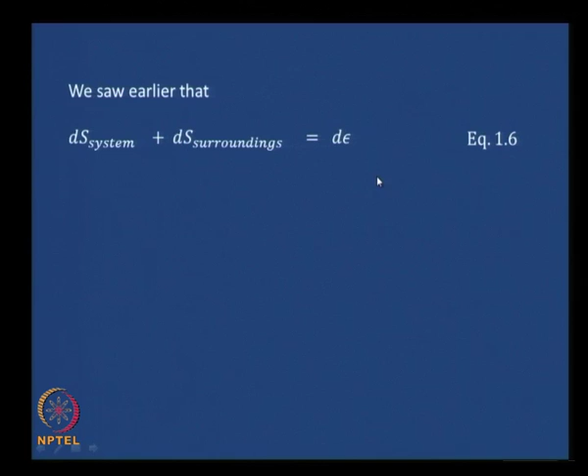Now let us consider these surroundings as a heat sink, as it is called, at a constant temperature T0. This heat sink is a very useful concept. It actually refers to bodies whose temperatures do not change despite interactions with the systems they are in contact with. For example, there are many things that can be considered as sinks or approximated as sinks. We can consider the Earth's atmosphere as a sink. It remains at a constant temperature for a certain period of time, or the Earth's surface could also be considered a suitable sink, especially for biological systems of relevance.

Let me also state this - it may not be completely clear right now, but it will become clear maybe after the 5th module or so. The heat sink is also supposed to be in a condition of internal equilibrium with no irreversible changes occurring inside it. This needs to be stated as one of the conditions of the heat sink. Let me state it again and leave it at that, and let us wait till the 5th chapter to make better sense of it. The heat sink is supposed to be at a condition of internal equilibrium with no irreversible changes occurring inside it.

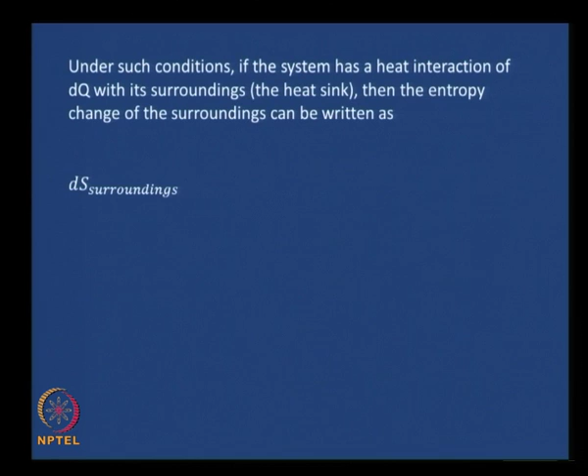Under such conditions, if the system has a heat interaction of dq, a differential q, with its surroundings, which is the heat sink in this case, the entropy change of the surroundings can be written as - remember the second law we looked at earlier - ds of the surroundings is nothing but minus dq by T0, minus because of the convention, the direction with which this negative is associated. Remember, we are writing this for the surroundings. So minus dq by T0. Let us call this equation 252.

Since we have already identified ds surroundings as minus dq by T0, we will drop the subscripts now just for convenience, and ds will as usual correspond to the system. ds system plus ds surroundings, which has been replaced by minus dq by T0, is the same as d epsilon. ds minus dq by T0 equals d epsilon. Let us call this equation 253.

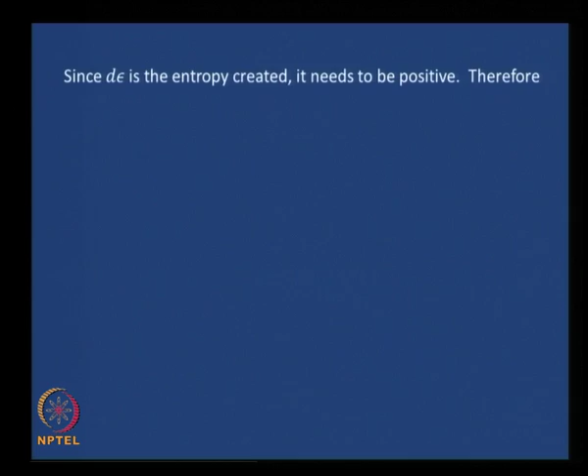Remember, d epsilon is the entropy that is created, and according to the second law, expanding universe and so on, it definitely needs to be positive. Therefore, dq by T0 needs to be either less than or equal to ds. This directly follows from this equation - we are comparing this and this. This needs to be less than or equal to ds for this to be positive. We will call this equation 254.

These are all very generic, coming right from the second law, and this equals ds for a reversible process undergone by the system, and is less than ds for an irreversible process.

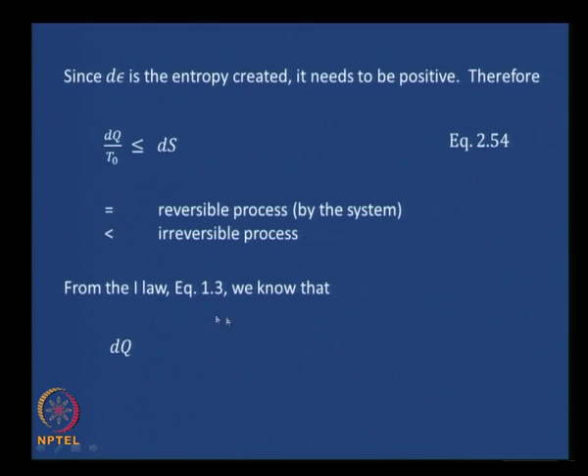Now, let us look at the first law, some very basics again. Equation 1.3, we know that dq, this is for a closed system, dq equals du plus dw. If we substitute the first law of thermodynamics into equation 253, ds plus minus of dq by T naught equals d epsilon, we are going to substitute for dq, and we will get ds equals dq being replaced by du plus dw, all divided by T naught, plus d epsilon. We have transposed the equation, therefore the negative sign goes away there.

Or if we multiply throughout by T naught and then transpose the equation, we will get T naught ds equals du plus dw plus T naught d epsilon, and then grouping the terms appropriately we can write dw equals T naught ds minus du minus T naught d epsilon. We will call this equation 255.

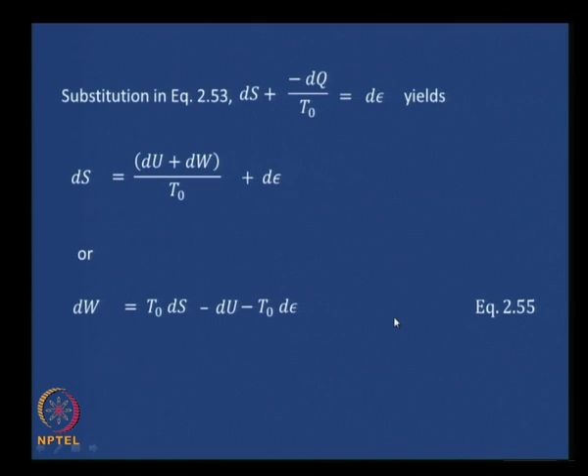Note that d epsilon is positive, and T naught, the temperature, needs to be positive in Kelvin. Therefore the product of those two terms, T naught d epsilon, is positive, and thus dw needs to be less than T naught ds. This needs to be positive, and dw needs to be less than or equal to T naught ds minus du. Du we do not really know what is happening there. We will call that equation 256.

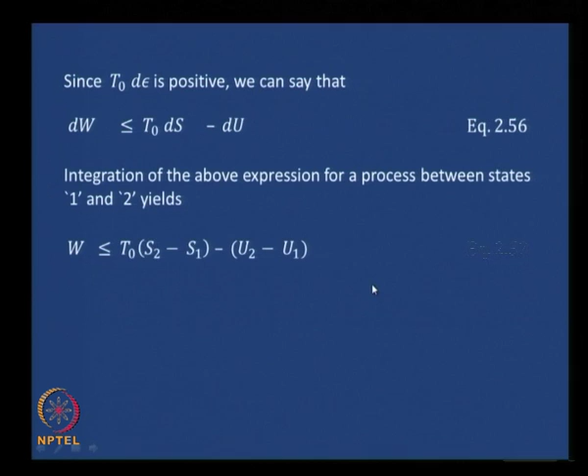Now if we integrate this expression between the states 1 and 2, it is a straightforward integration. Integral dw is w, and this inequality remains less than or equal to T naught ds integrated between 1 and 2, giving S2 minus S1, minus du integrated between 1 and 2, giving u2 minus u1. We will call that equation 257.

Note this equation: this is some quantity and this is some quantity. Since w is less than or equal to the right hand side, the maximum work possible is when w equals the right hand side. Therefore the maximum work possible, which occurs under reversible conditions, indicated by w max, can be written as T naught times S2 minus S1, minus u2 minus u1.

Therefore we have a measure of the maximum work available from a process in terms of the state variables of the system. T naught is the temperature of the surroundings, while S2, S1, U2, U1 all correspond to the state variables of the system. Let us call that equation 258.

We started out by saying this, so let me re-emphasize it. The maximum work can be used to arrive at limiting conditions, for example the maximum possible work for a closed system, which can in turn be used for quick estimates, to evaluate claims on design, as well as to begin the design itself.

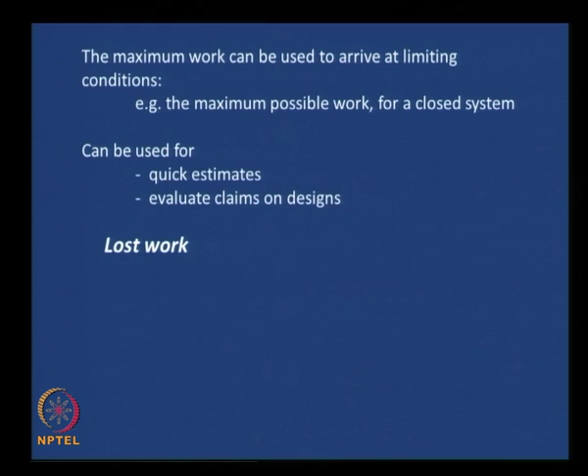The lost work, as we said, is the difference between the maximum work and the actual work, that is the ideal or reversible work minus the actual work. The reversible work we have as T naught ds minus du, from earlier. The actual work happens to be T naught ds minus du minus T naught d epsilon. Therefore these two terms cancel, and we have an expression for the lost work as T naught d epsilon.

After integration, we get work lost equals T naught times epsilon, in terms of the sink or surroundings temperature, assumed constant, times the entropy that is created. We will call this equation 259.

At this juncture, we have looked at many different things so far in this module, and therefore it will be good to review whatever we have seen so far, especially in thermodynamics. There are lots of relationships and lots of seeming confusion, but actually there isn't much. If you look at it another time, things would be a lot clearer. We will do that before we get on to open systems. So let us start a review before we go on to open systems.

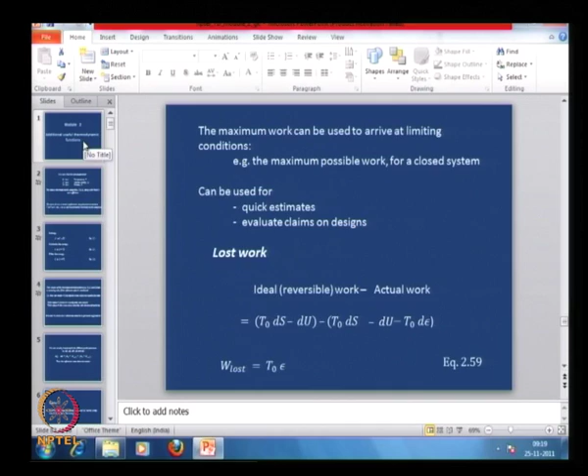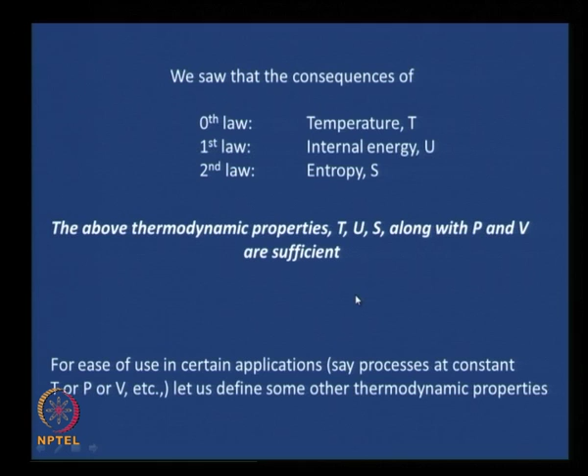We began this module looking at additional useful thermodynamic functions. We said that internal energy U and entropy S, along with P, V, T, are typically good enough thermodynamic functions, but in certain cases we said certain other functions would turn out to be more useful, and we went ahead and defined them.

The first one was enthalpy, defined as internal energy plus the product of P and V. The next was the Helmholtz free energy, which we will use to a certain extent in this course, but in general it is useful. Helmholtz free energy, indicated as A, is the difference between internal energy and the product of temperature and entropy. And Gibbs free energy, G, is the difference between enthalpy and the product of temperature and entropy.

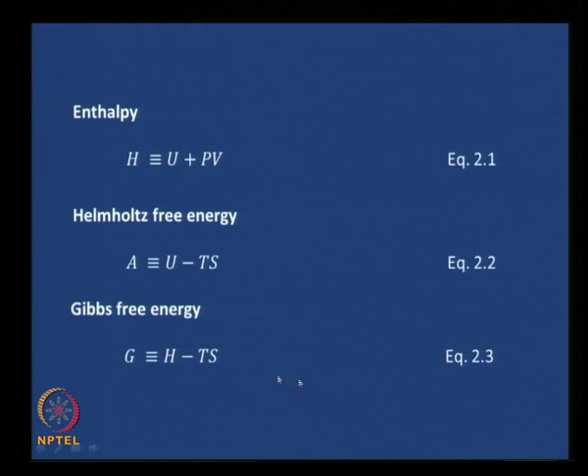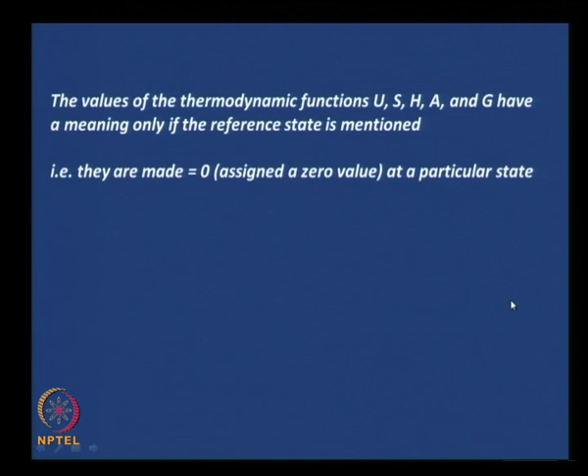These were the three additional functions we defined. We then said that any thermodynamic function needs to be given a reference state. The value of the thermodynamic function, whether U, S, H, A, G or others, makes sense only with a reference state being mentioned. At the reference state we assign a value of 0 to it, and we went through the exercise of thinking about where the temperature is actually assigned a 0 value.

If you think about it, it's an assignment of a 0 value at a certain condition where there is no movement of molecules and so on, and we also looked at where the 0 value of pressure is assigned, where we said it is equal to 0 when there are no particles, with complete absence of particles. And the nice thing about thermodynamic manipulations is that one can fix one's own reference state for a particular application, but only at a certain reference state, with the value being 0.

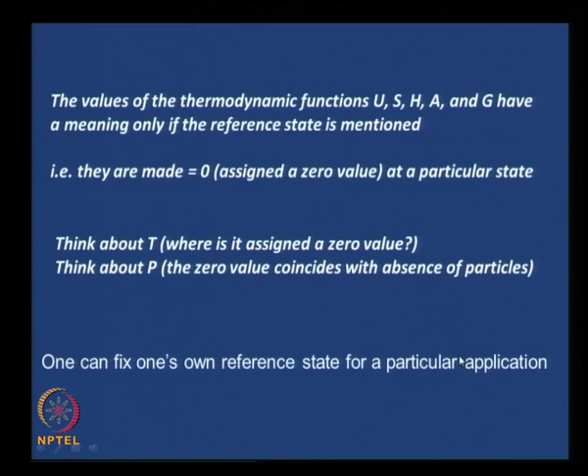Only if that is done will any of the thermodynamic functions make sense. And then we said that reference state does not really matter. We demonstrated that by considering the difference in, say, U, for a particular process. We said that if U2 is some value, then U2 minus U reference is the value that makes sense at state 2, and U1 minus U reference is the value that makes sense at state 1. Taking the difference, (U2 minus U reference) minus (U1 minus U reference), the reference terms cancel out, leading to U2 minus U1. Therefore, whatever is chosen as a reference state does not really matter, because we take differences all the time.

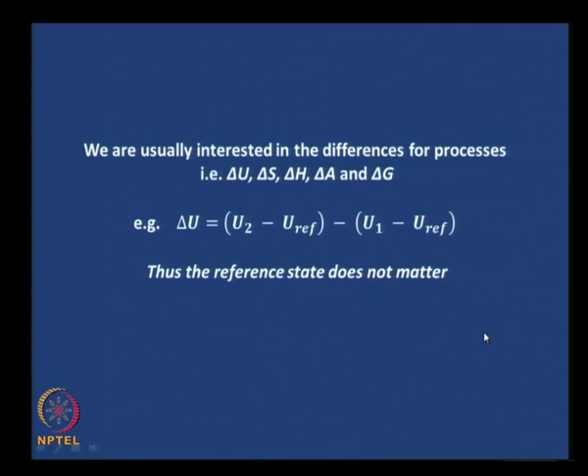And then we went and did some exercises, and we also said that H, A and G were defined for 1 mole, and if there are n moles of a pure substance, then we can either call that as NH, the value of enthalpy as NH, which will be defined as NU plus P times NV.

P is an intensive variable, it does not depend on the number of moles that are available, but we said that a better terminology would be to consider a superscript T for total values when there is more than one mole present. Therefore, Ht equals Ut plus P Vt, At equals Ut minus T St, these are all definitions, and Gibbs free energy total, Gt, was equal to Ht minus T St.

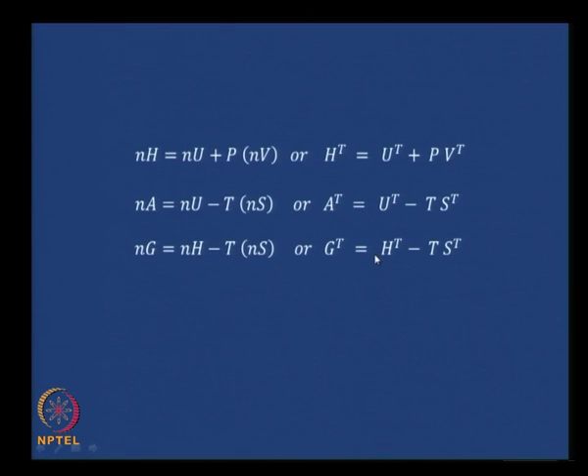And then we went on to consider 1 mole of a pure substance, and we also said at this point that whatever we are going to develop in this module, unless otherwise stated, will be for a closed system, okay. And that is where we have stopped right now.

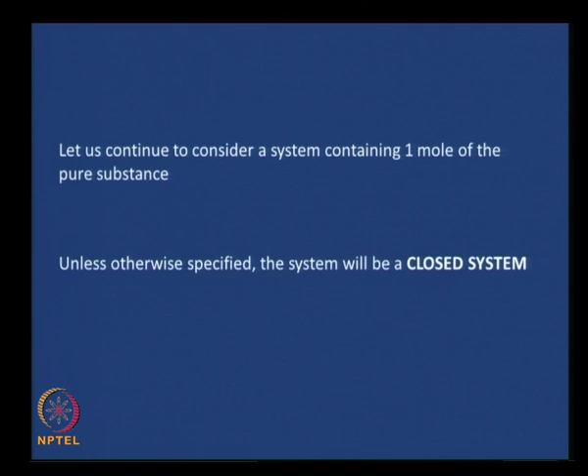We have developed all the necessary fundamentals for a closed system, and therefore, before we went on to open systems, we thought we could do a review. We started by considering a single component system which exists in a single phase.

As we all know, the phases that are being considered in this course are only 3: either a gas, or a liquid, or a solid. Gas is also called vapor.

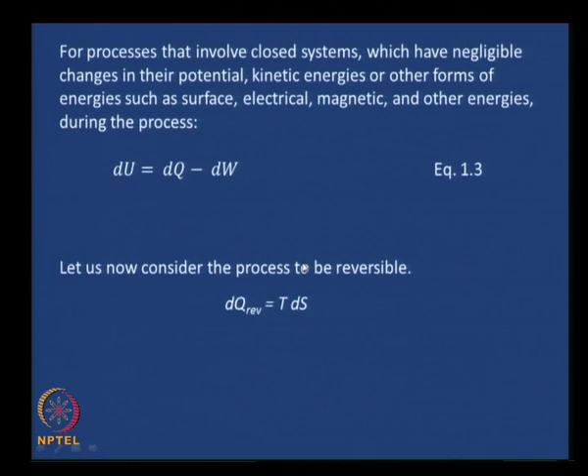And we said that for processes that involve closed systems which have negligible changes in their potential, kinetic, or other forms of energies such as surface energy, electrical energy, magnetic energy, we could write dU equals dQ minus dW, this is the first law. And if we consider the process to be reversible, we could write the second law as dQ reversible equals TdS.

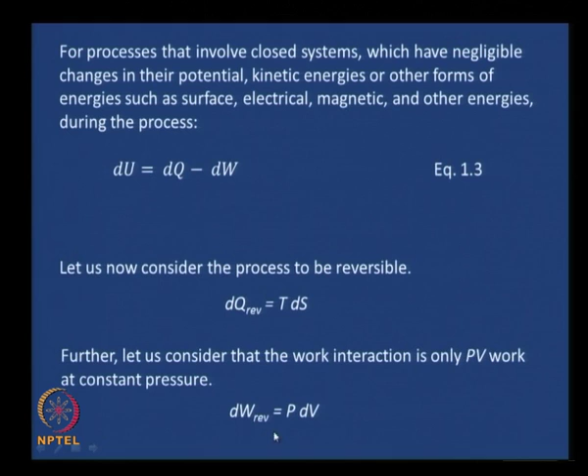And if PV work is the only work interaction that is considered at constant pressure, then dW reversible was P dV. Under such conditions, we could modify the first law as dU equals dQ reversible minus dW reversible, and therefore, we could write dU equals TdS minus P dV. You could recall that this became one of the most basic equations for a closed system.

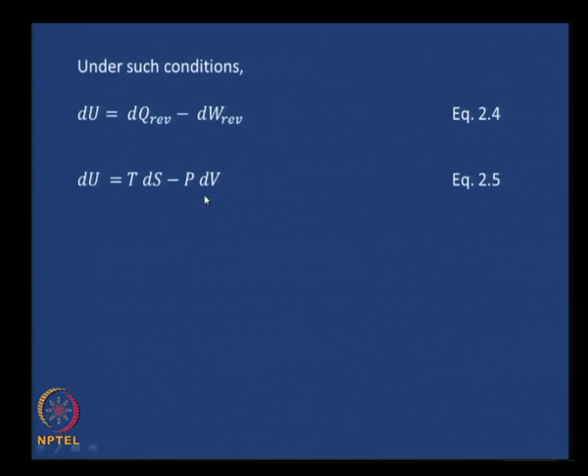And we also said that although we considered various things to arrive at this particular point, that is dU equals TdS minus P dV, since this equation contains only state variables which depend only on the state of the system and not on the path taken to reach, say, state 2 from state 1, this is valid for anything as long as it is that of a closed system.

And to understand that a little better, the equation as a whole is applicable for anything. Nevertheless, the interpretation of the individual terms is applicable only for that particular path. For example, in this case, TdS represents heat interaction only for a reversible process, and P dV represents work interaction only for a reversible process. That does not change.

Nevertheless, the difference between the two, which is dU, is applicable in general, whether the path is reversible, irreversible, whether it has kinks in between it or a smooth path, nothing of that sort matters.

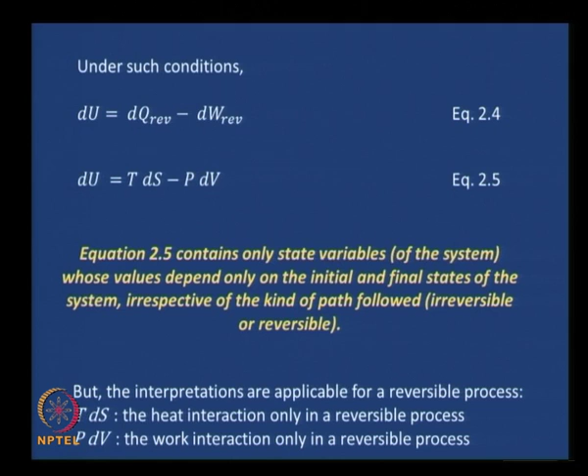And to understand that a little better, because this was one of the central concepts that we were going to use repeatedly later, we sought to understand that better by considering a mountainous region in which our interest was the difference between the heights between 2 points, let us say 1 and 2, or states, if you want to call it state 1 and state 2.

Our interest was h2 minus h1, the difference in heights. We said there could be different paths taken - you could take a nice road, a hilly road which is not well charted out, or take a helicopter and land here. Whatever path you take, the difference in heights between these two remains the same; it does not really depend on the path. That is the same thing that happens whenever we have the final equation in terms of state variables, irrespective of the path considered.

Also, we said that some paths could make it easier for us to compute the difference in thermodynamic functions between the two states. For example, along the nice road, an altimeter is available, so you could measure the heights at various points, and the difference between 2 and 1 would give you the delta h required. Therefore we choose an experimental path where the means of measuring the variable of interest is available, and once we bring it down to an equation consisting only of state variables, we can use that equation in general.

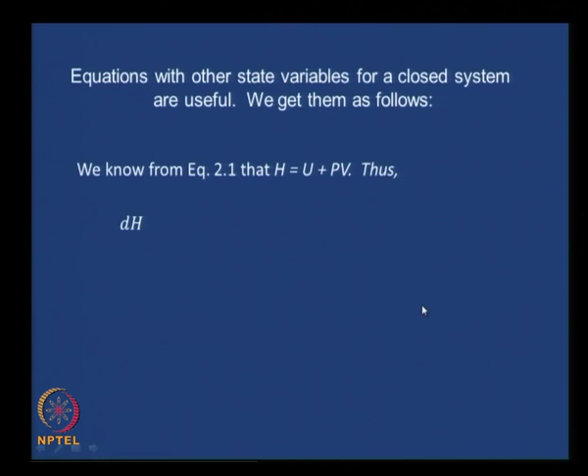We also said there could be other equations for a closed system which would come in useful, and we derived them. Let me not go through the derivation but tell you just the final expressions - you can go back to the slides and look at how we derived them. We said that dH equals TdS plus VdP.

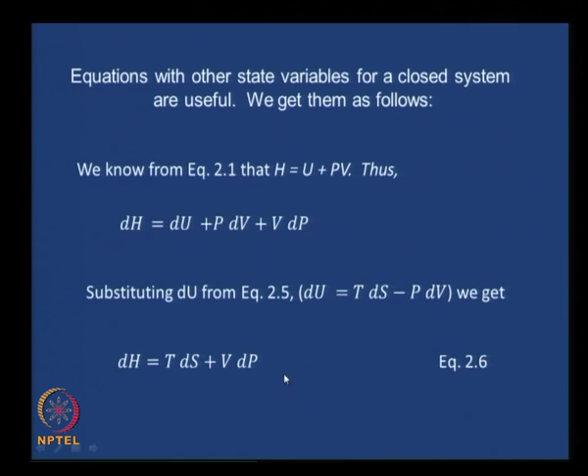dA was minus SdT minus PdV, and dG was minus SdT plus VdP. I think we also put it all together somewhere. Yes - dU equals TdS minus PdV, dH equals TdS plus VdP, dA equals minus SdT minus PdV, dG equals minus SdT plus VdP. These are nice equations to remember, 2.5 to 2.8, especially if you have closed book exams as typically happens in university exams. If not, you know how to derive them reasonably quickly, and you do not have to remember these.

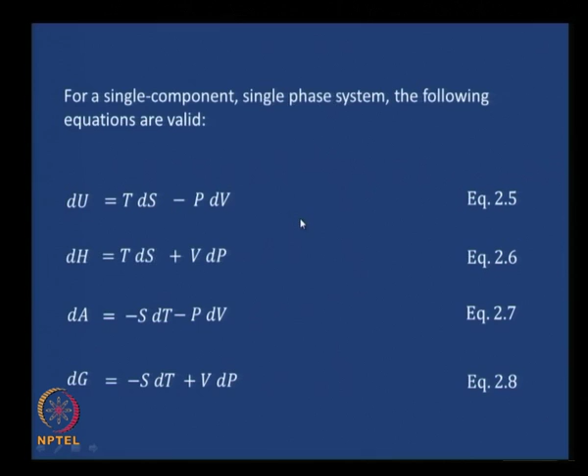We also said that if the number of moles is more than 1 - the earlier equations were all for 1 mole of a closed system, pure component - the same equations are valid. This is not very obvious, so you were asked to look at your reference book by Kenneth Denbigh, where the proof is given as to why the same forms are applicable even for total variables, the thermodynamic variables taken for systems with more than 1 mole of the pure substance.

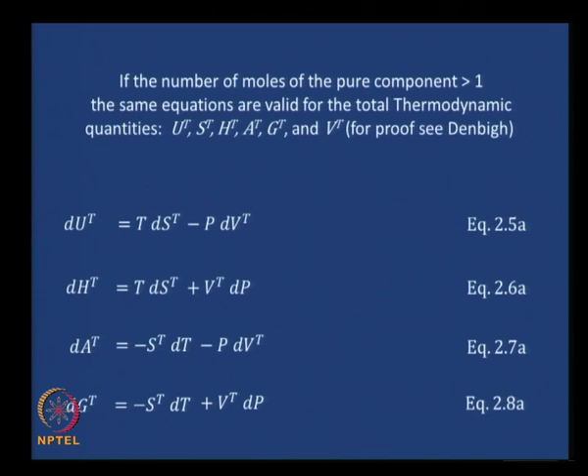Therefore dU total equals T dS total minus P dV total - since T is an intensive variable it does not need a superscript, similarly P is intensive. dH total equals T dS total plus V total dP, dA total equals minus S total dT minus P dV total, and dG total equals minus S total dT plus V total dP. So we looked at equations for a closed system of a single mole, and for a closed system of more than 1 mole but of only 1 pure substance.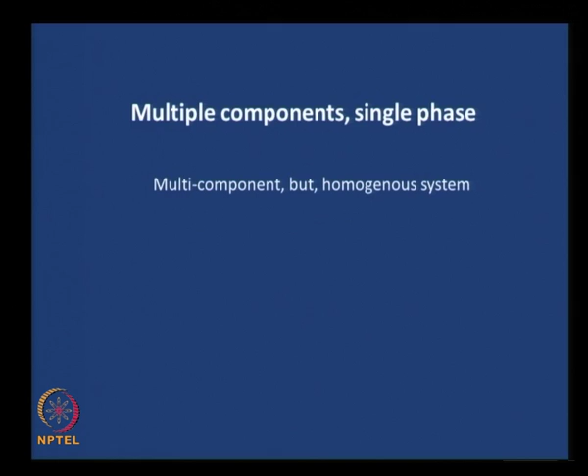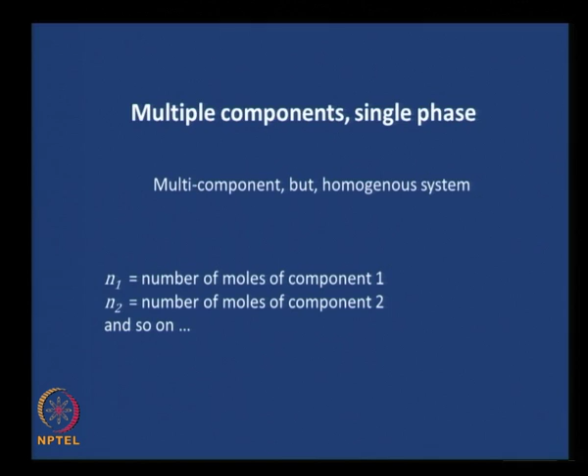Then we complicated it a little by considering a multi-component system, but retained the single phase nature of the substance. This was some terminology - N1 is the number of moles of component 1, N2 the number of moles of component 2, and so on. This could be a multi-component single phase system, for example air which contains water vapor. Air by itself has many different components in the gaseous phase such as oxygen, nitrogen, carbon dioxide, and if you add water vapor it also has H2O - that is a very good example of a multi-component system existing in a single phase.

For that we looked at what equations would be useful to use. To derive that, we started with the generic mathematical representation of a function of a variable in terms of its independent values. We took U total as a function of S total, V total and so on, and we wrote the total differential going by one of the theorems in calculus - total differential dU total equals partial of U total with respect to S total.

St is the first variable taken here, with all other variables remaining constant: Vt, n1, n2, n3, the constancy of which is represented as ni, gives dou Ut dou St dSt, plus the second variable dou Ut dou Vt with all other variables constant times dVt, and dou Ut dou n1 with all others constant times dn1, plus dou Ut dou n2 dn2 and so on. We combined all the n terms into a summation sign for compact notation as sum of dou Ut dou ni at constant Vt, St, nj, which represents the constancy of all n's except the one being differentiated, dni.

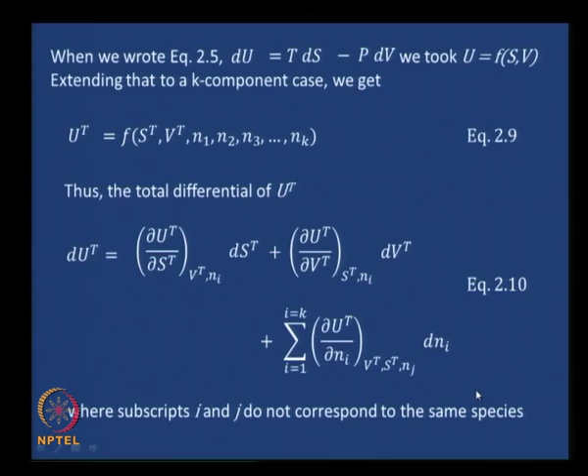And then we got down to dou Ut dou St at constant Vt, ni equals T, and dou Ut dou Vt at constant St, ni equals minus P.

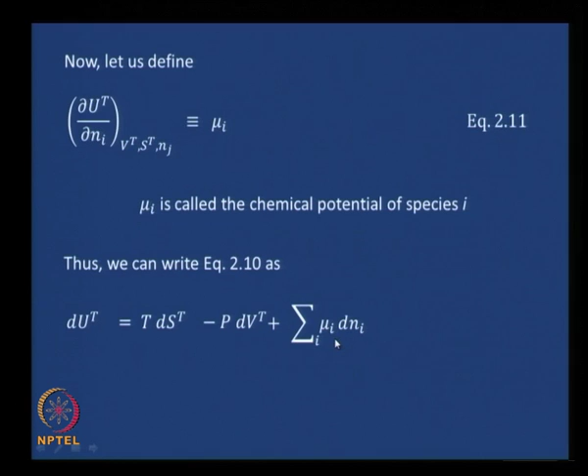And we said that we went ahead and defined one of the fundamental intrinsic properties which will pretty much form the backbone of this course, as you will find out in the later modules. We said that dou Ut dou ni at constant Vt, St and nj equals the chemical potential, and therefore you could write the equation as dUt equals T dSt minus P dVt plus sum over mu I dni's, and we could derive the other equations also.

dGt equals minus St dT plus Vt dP plus sum over all I mu I dni, and since we used the same term mu I whether we started from Gt or Ut, we had to prove that they were the same. Before that, one important point to note is that dou Gt dou ni at constant T, P, nj equals mu I. This definition is predominantly used because the terms held constant here, T, P, nj, are all easy to manipulate from an experimental point of view, and therefore this is pretty much the preferred definition of mu I, although you could define it by the other three means also.

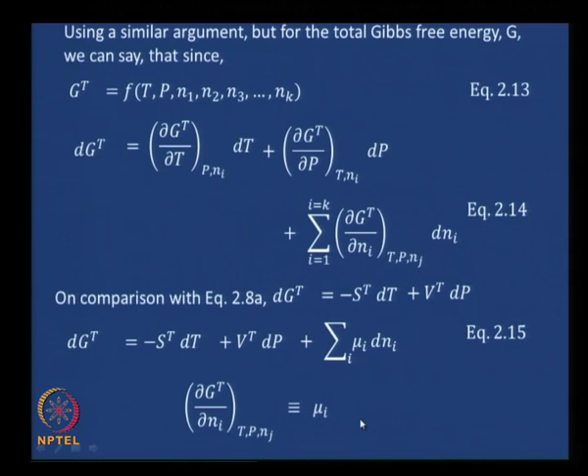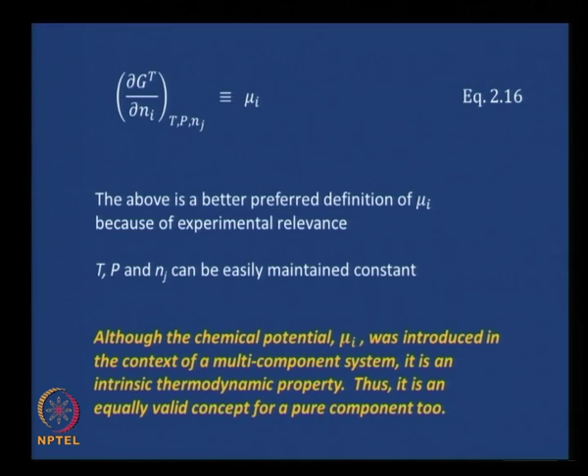This is how we went about proving that mu I is the same whether we started from Ut or from Gt. I will not go through the proof; you could go back to your notes and see how we proved it. This is important: although the chemical potential mu I was introduced in the context of a multi-component system, it is an intrinsic thermodynamic property, thus it is an equally valid concept for a pure component also.

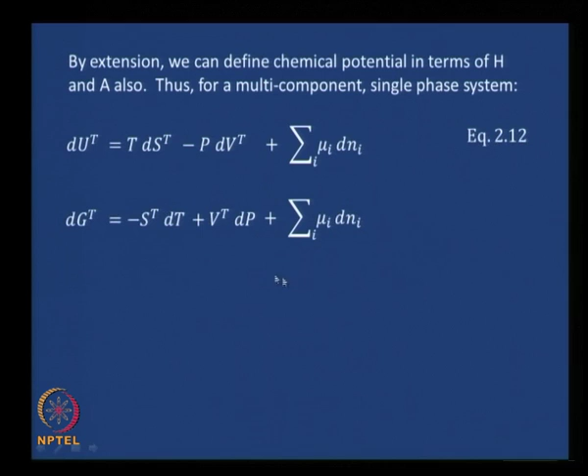We extended the derivation to other thermodynamic variables of interest such as At and Ht, you could do that, and we have a comprehensive set of equations valid for a closed system consisting of multiple components but in one phase: dUt equals T dSt minus P dVt plus summation of mu I dni, dGt equals minus St dT plus Vt dP plus summation of mu I dni, dHt equals T dSt plus Vt dP plus summation of mu I dni, dAt equals minus St dT minus P dVt plus sum of mu I dni. So irrespective of how mu I is defined, they are all the same.

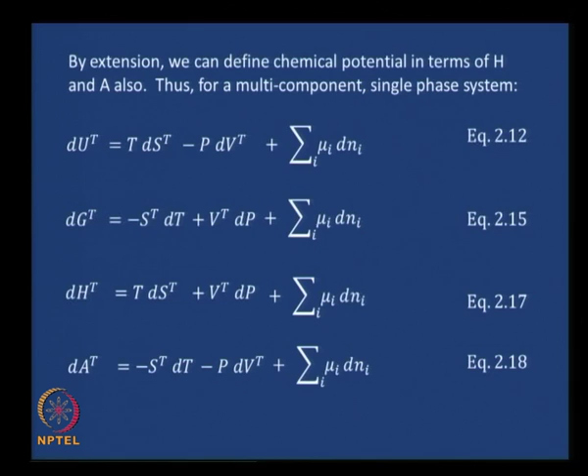Now we did a nice exercise by which we could compare the equations with the standard expansions written in terms of partial derivatives, and therefore we could assign partial derivatives to the thermodynamic functions. For example, we said dou Ut dou St at constant Vt, Ni, going by a standard expansion for the total differential, is nothing but T, and this T is also dou Ht dou St at constant P, Ni. Similarly, dou Ut dou Vt at constant St, Ni was minus P, and this minus P is dou At dou Vt at constant T, Ni. Minus St here, in terms of an expansion, is dou At dou T at constant Vt, Ni; here it is dou Gt dou T at constant P, Ni. Vt was dou Ht dou P at constant St, Ni, and Vt was also dou Gt dou P at constant T, Ni, and this is quite straightforward. We have already seen this.

Mu I here was dou Ut dou Ni at constant Vt, St, Nj; here it was dou Ht dou Ni at constant St, P, Nj; here it is dou At dou Ni at constant T, Vt, Nj, there is to be a superscript here; and here it was dou Gt dou Ni at constant T, P, and all other Nj's. So this is a nice relationship between thermodynamic properties and derivatives, which will turn out to be useful in many manipulations.

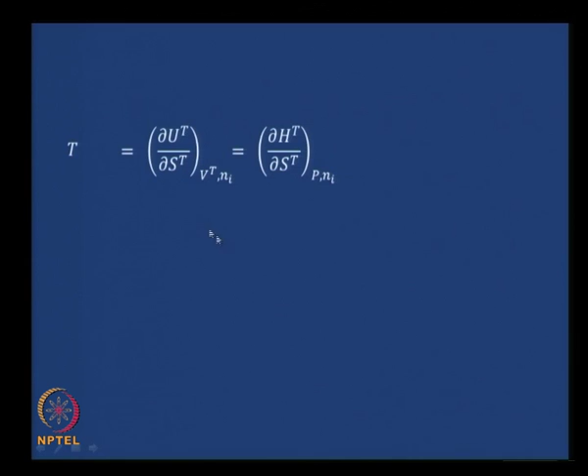This is just listing it out. I don't think I will go through it again, we have already seen it. Okay.

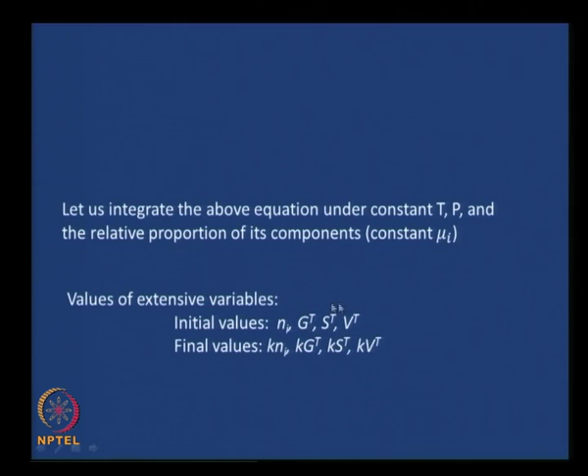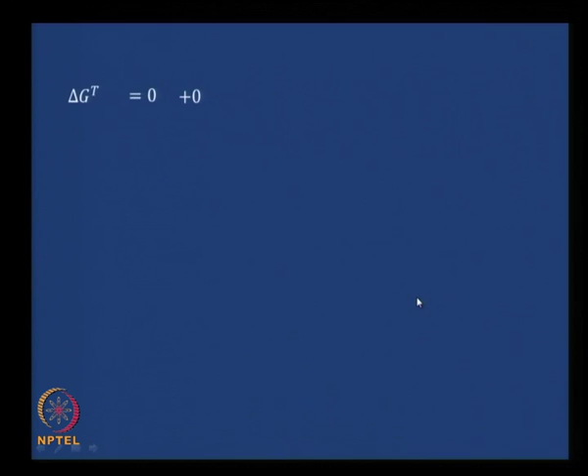Then we looked at one of the central equations in classical thermodynamics, called the Gibbs-Duhem equation. We went ahead and derived it by starting with the expression for dG and integrating it, considering a system being made larger and so on, and we arrived at this equation.

St dT minus Vt dP plus sum of Ni d mu I equals 0. Note that this gives you the variation with temperature, pressure and chemical potential, the three major intensive quantities of a system, and this is called the Gibbs-Duhem equation.

We also said this will have relevance later because the temperature gradient would form the driving force for energy transport as heat, the pressure differential would form one of the driving forces for bulk flow, and chemical potential gradient would be the driving force for mass flow, so this has some special relevance, the Gibbs-Duhem equation.

This relationship between simultaneous variations in the intensive parameters T, P and mu I is worth re-emphasizing.

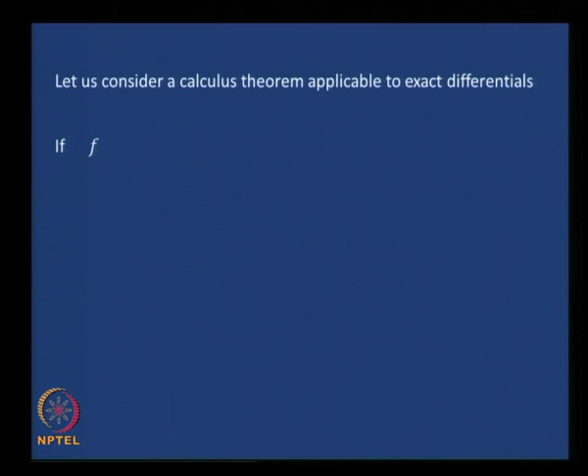Then we looked at Maxwell's relations by applying a basic theorem in mathematics called the reciprocity relationship, which applies if we are considering exact differentials—all our thermodynamic variables can be written as exact differentials. If f is a function of x1, x2 and so on till xk, then df can be written as dou f dou x1 at constant xj dx1 plus dou f dou x2 at constant xj dx2 and so on till dou f dou xk at constant xj dxk.

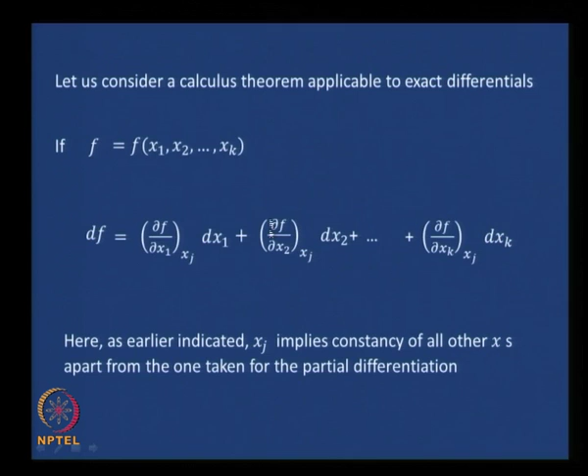If each of these are replaced by y's, say this one becomes y1, this one becomes y2 and so on, then the reciprocity relationship says that dou yi by dou xn at xj with all other x's remaining constant equals dou yn dou xi at all other xj's remaining constant.

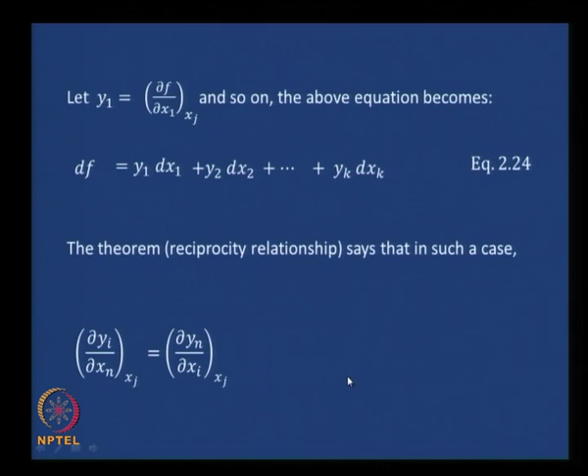If we apply this theorem to our expansions of differentials of thermodynamic functions U, H, A and G, then we got dou T dou Vt at constant St Ni equals minus dou P dou St at constant Vt Ni; dou St dou P at constant T Ni equals minus dou Vt dou T at constant P Ni; dou T dou P at constant S Ni equals dou Vt dou St at constant P Ni; and dou St dou Vt at constant T Ni equals dou P dou T at constant Vt Ni. There were probably a couple of others.

Yes, these two were interesting: dou mu I dou T at constant P Ni equals minus dou St dou Ni at constant T P Nj. Similarly, by comparing the other expressions, dou mu I dou P at constant T Ni equals dou Vt dou Ni at constant T P Nj.

So this gives the variation of chemical potential with temperature and with pressure, which could turn out to be very useful. These were the Maxwell's relations we considered, written for a general case, a multi-component system in a single phase.

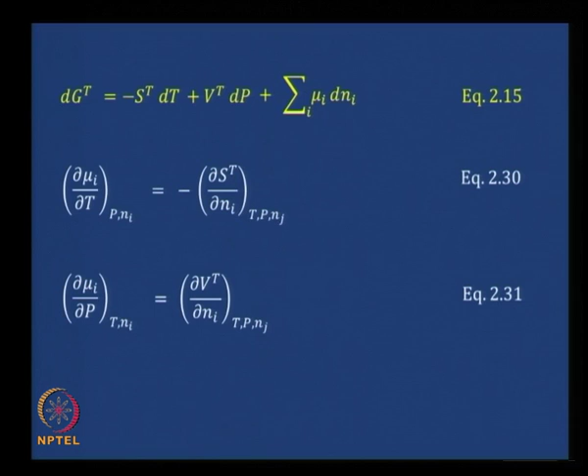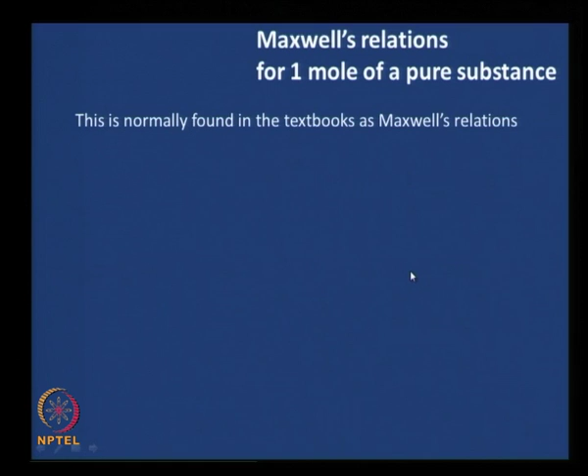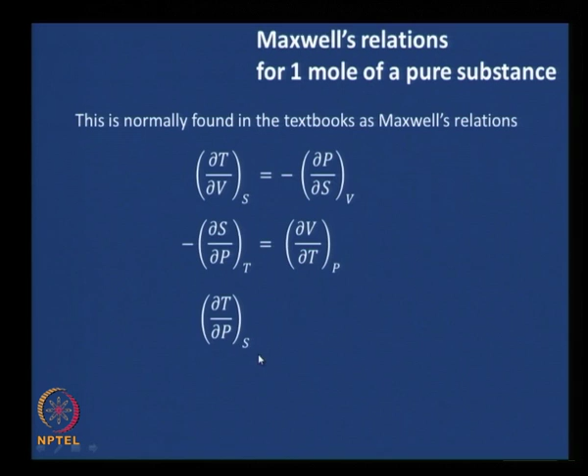Whereas what is found typically in textbooks initially is for a single mole of a pure substance, and for that we could write the first 4 equations directly—anything relevant to n drops out. Therefore dou T dou V at constant S equals minus dou P dou S at constant V; minus dou S dou P at constant T equals dou V dou T at constant P; dou T dou P at constant S equals dou V dou S at constant P; and dou S dou V at constant T equals dou P dou T at constant V.

Then I think we went through some exercises where we saw the use of these equations to solve some useful aspects—please go through them again. Then we brought in this idea of expressing difficult-to-measure thermodynamic variables in terms of easy-to-measure thermodynamic variables.

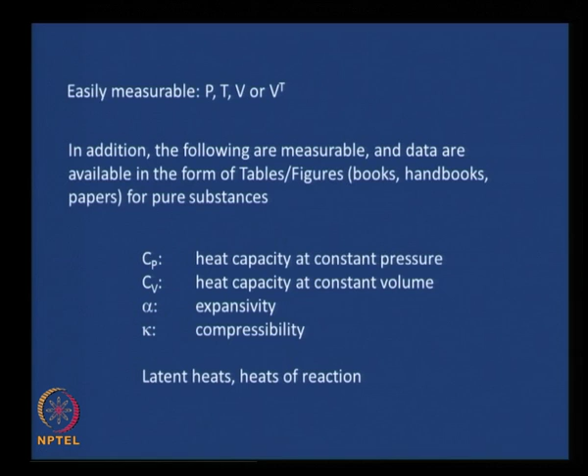Easy to measure thermodynamic variables were temperature, pressure, volume—either specific volume or total volume. Along with that we had added heat capacity at constant pressure, heat capacity at constant volume, expansivity, compressibility, and also latent heats and heats of reaction, although we did not consider these in great detail in this module. Since the values of these are available, if we can express the other thermodynamic variables in terms of these, it will be that much easier to evaluate the not-so-easy-to-measure thermodynamic variables, and that was demonstrated here.

We had defined heat capacity at constant pressure as dou H dou T at P, either for a pure substance or for any system in terms of T. Similarly, specific heat at constant volume was dou U dou T at constant V for a pure substance, or the relevant equivalent for any system.

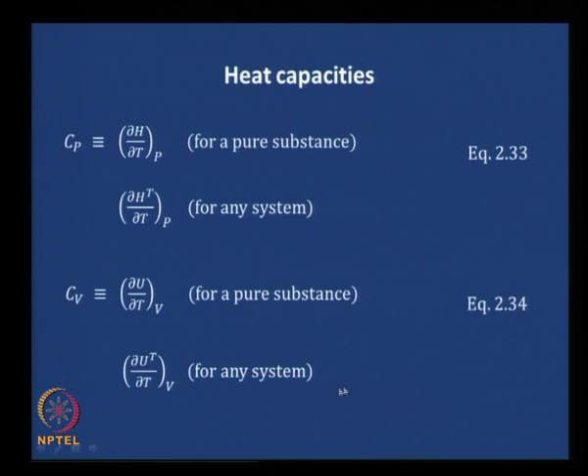We worked out an exercise by which we could express, in terms of easy to measure variables, quantities such as dH/dT at constant P, dS/dT at constant P, and so on.

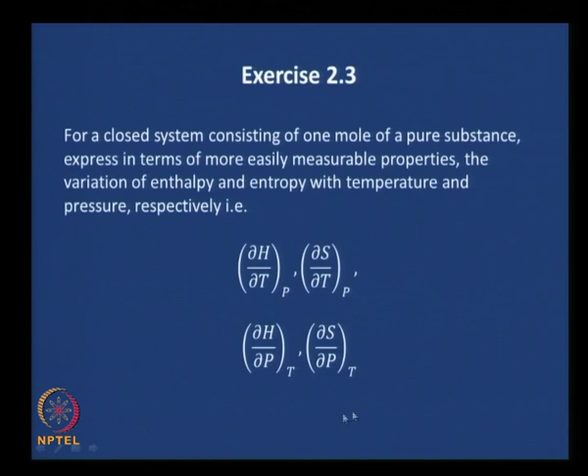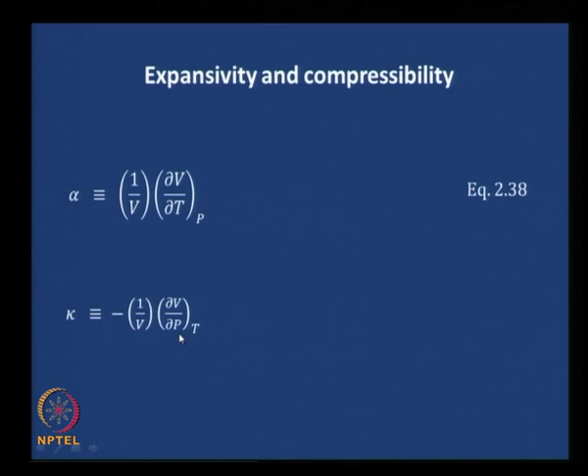The other two variables, somewhat easy to measure, for which values are available as tables and figures at the end of your textbook: Alpha, the expansivity, defined as 1/V times dV/dT at constant P. Kappa, the compressibility, defined as minus 1/V times dV/dP at constant T. These represent variation of molar volume in terms of temperature at constant pressure, and variation of molar volume in terms of pressure at constant temperature.

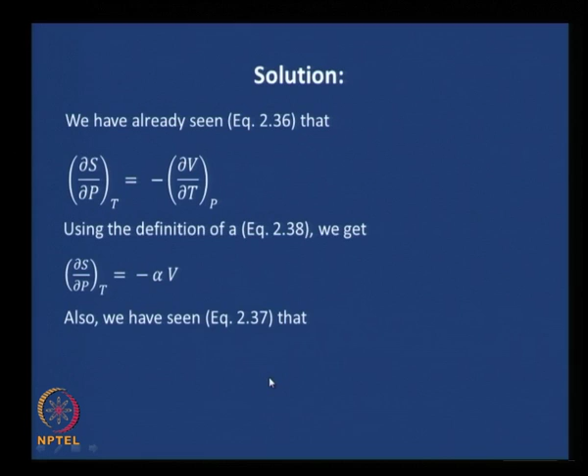We saw an exercise which demonstrated the use of these variables in finding out the not-so-easy-to-measure quantities in terms of these variables. We had utilized mathematics and manipulations quite a bit to do this.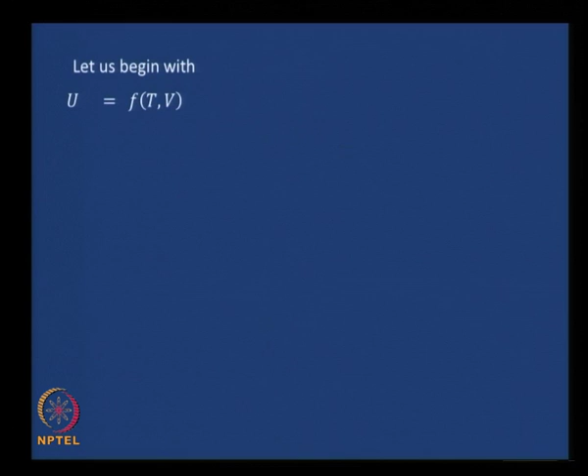Then we introduced two useful mathematical manipulations. One was change of variable, where data could be available in terms of one set of variables, but you want the same information in terms of another set of variables. You could use a mathematical technique called change of variable to do that. We gave an example in terms of internal energy as a function of temperature and volume, which is typically known, and you want it in terms of temperature and pressure. Then you can do this manipulation and estimate the values.

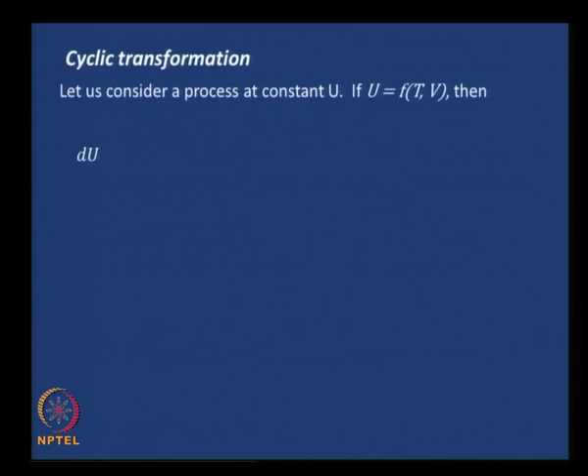Then we considered cyclic transformation, which is very useful, as we saw. Let us go to the final expression. We had derived it, which is the strength of this particular course. We derive everything.

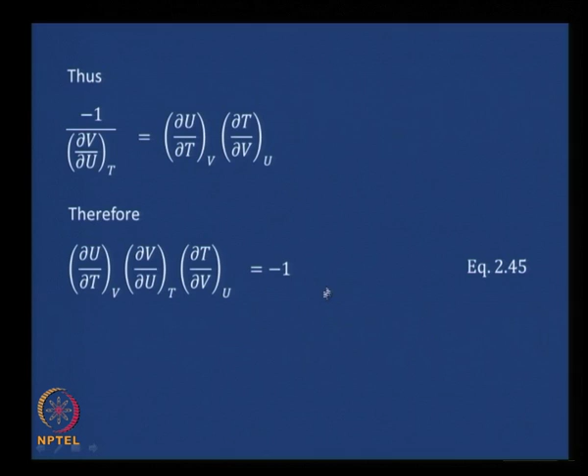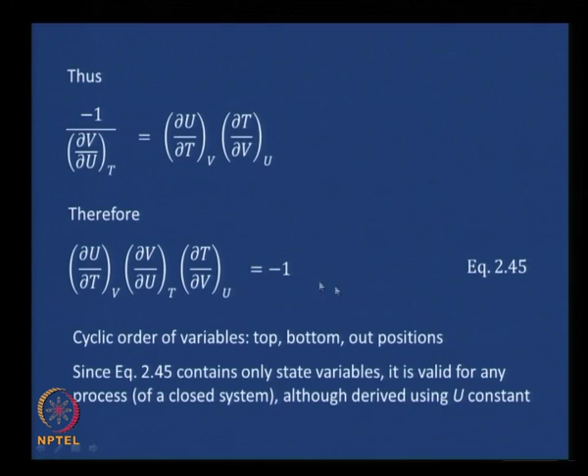This was one cyclic transformation. We had: dU/dT at constant V, dV/dU at constant T, dT/dV at constant U, equals -1. We said this follows a cyclic pattern: whatever is on top goes to the bottom, whatever is at the bottom goes out, and whatever is outside goes to the top. This can be written for many different thermodynamic variables, the cyclic transformation equals -1, and we also applied that to a real life situation.

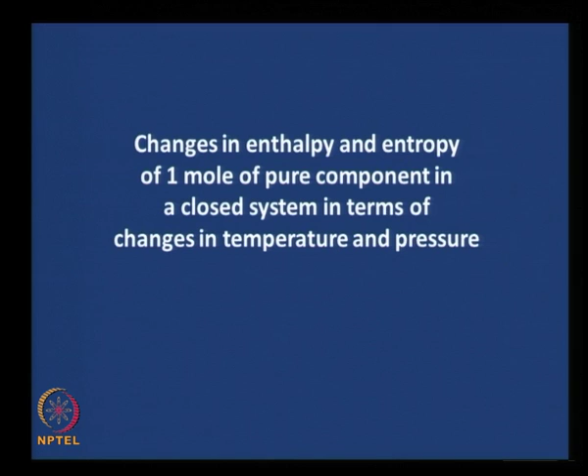Then for ease of use, I had shown you changes in enthalpy and entropy for 1 mole of a closed system in terms of changes in temperature and pressure. This is more of convenience, not really very fundamental, but useful nevertheless.

dH was dH/dT dT plus dH/dP at constant T dP, and S was also written in terms of temperature and pressure. Then we got these in terms of easy to measure thermodynamic variables: dH equals Cp dT plus V times (1 minus alpha times T) dP, and dS we got in terms of Cp/T dT minus alpha V times dP. We worked out a problem.

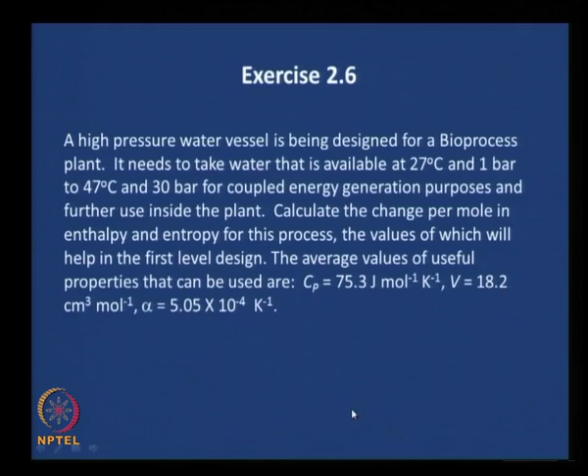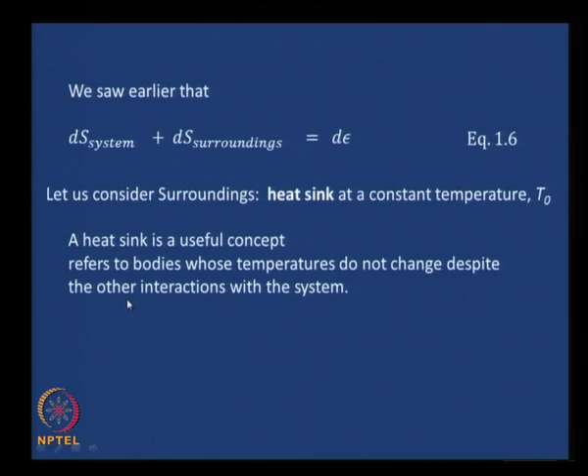And today we saw what maximum work was and what lost work is. We started out from the very fundamentals, first law and second law, in that order, and derived the expression for maximum work. We had introduced the concept of a heat sink, a useful concept which refers to bodies whose temperatures do not change despite other interactions with the system.

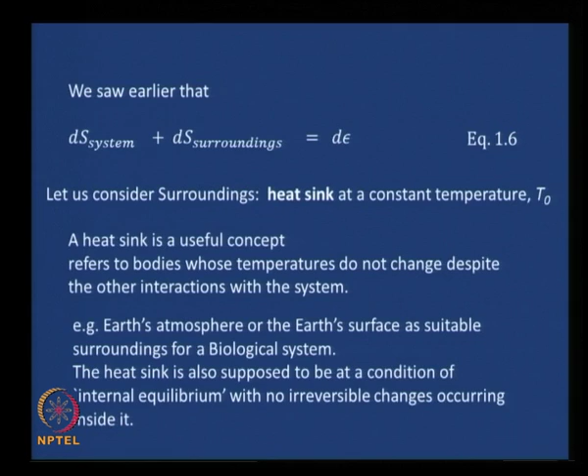We said that Earth's atmosphere or the Earth's surface is a suitable surroundings for a biological system, which can be considered as a heat sink. We also said that in a heat sink there is internal equilibrium and so on. And we arrived at an expression for maximum work.

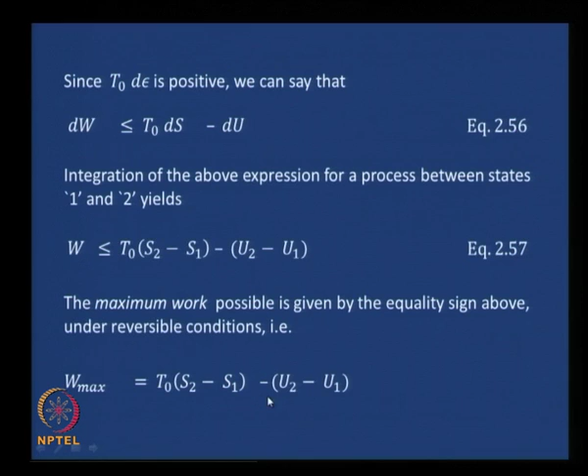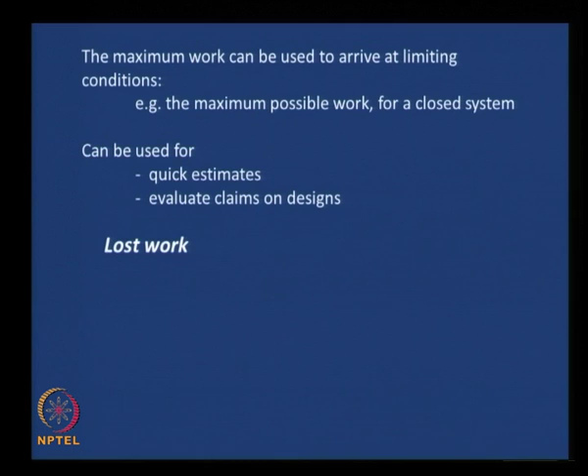W max equals T naught, the sink or surroundings temperature, times (S2 minus S1) minus (U2 minus U1). We said the maximum work can be used to arrive at limiting conditions, the maximum possible work for a closed system for example, or can also be used for quick estimates, to evaluate claims on designs, or to start design itself. Then we arrived at an expression for lost work, equal to T naught times the entropy created, epsilon.

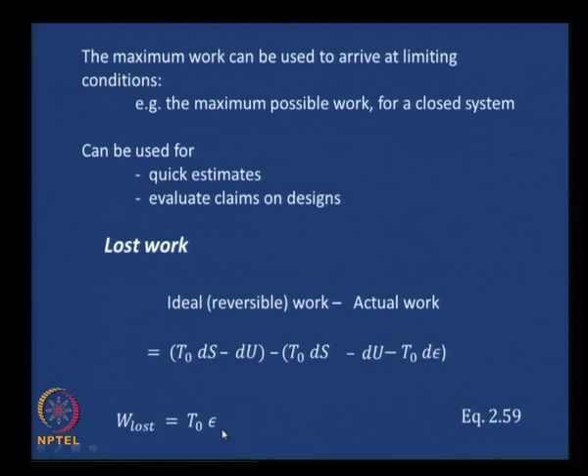That was a review of whatever we have done in this module, and so far we have considered closed systems. In the next class we will look at open systems.